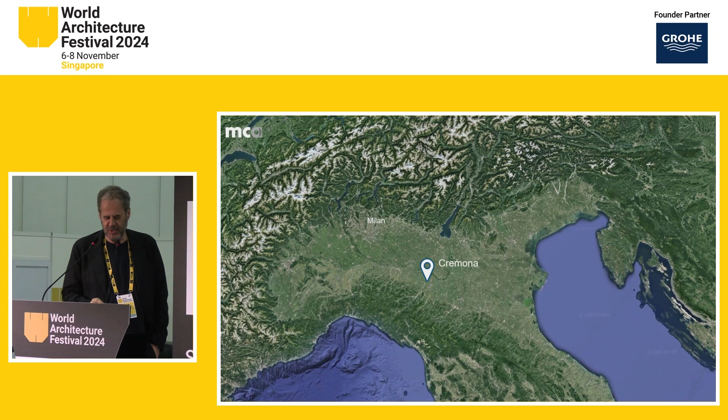Hi, thank you. Well, just introducing, Cremona is a small city south of Milan and is very well known because they made the violin Stradivari, if somebody remembers. That's the city of violins. And also it's the city of music. If you go walking around the city, you can really enjoy music and lyrics.

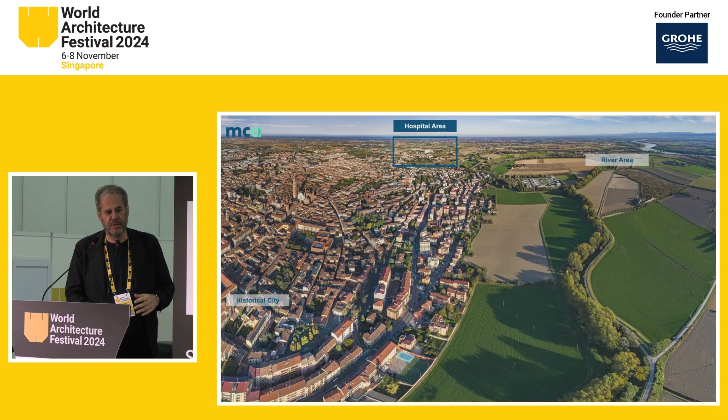So this is a preliminary sketch of the hospital. We are a little bit outside of the historical center, really on the edge between rural and urban. This is a small city, and like a lot of small cities around Italy, the rural area is very close to the city. The hospital is really a link between the rural area and the city center.

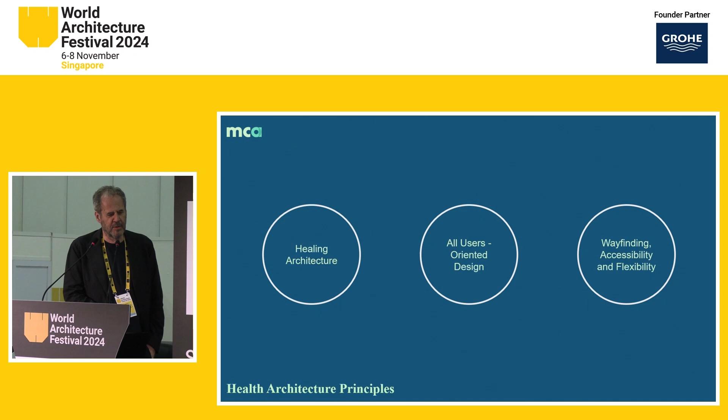It's based on three basic simple principles: healing architecture, all users-oriented design and wayfinding, accessibility and flexibility. What I want to say is there are three scales of this project. One is an urban scale, then a building scale, and then a small part of the building, which is the cell, the room - how we design a room for patients.

So this scheme just gives you the idea - the hospital is a circle, but it's open in the middle for an ecological corridor, connecting the nature from the north to the river. And the building is just green, it's a roof, it's green like the park in the middle.

I was inspired by the hospitals of the last century. You remember hospitals were made by pavilions. A lot of hospitals had a park because the healthy part of the hospital was walking in the park, which has good air and quality. Then we changed structures and made these kinds of big buildings, with no relation to outside.

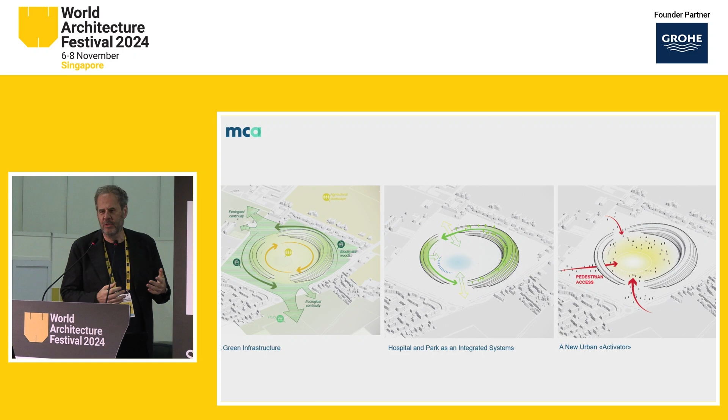So this is the same idea. The building embraces a park in the middle, which is public. And I like the idea that people go to the park hospital for walking, just to get a nice time, walking around the hospital. So it's a primary destination, not only for people for curing, but also for citizens, as it was before. So it's not only specialized for curing, but it's part of everyday life in the city.

So this is a different scheme, and I think what's very important is the division - one wing is all dedicated to the hospital, and the other part is the service for the hospital.

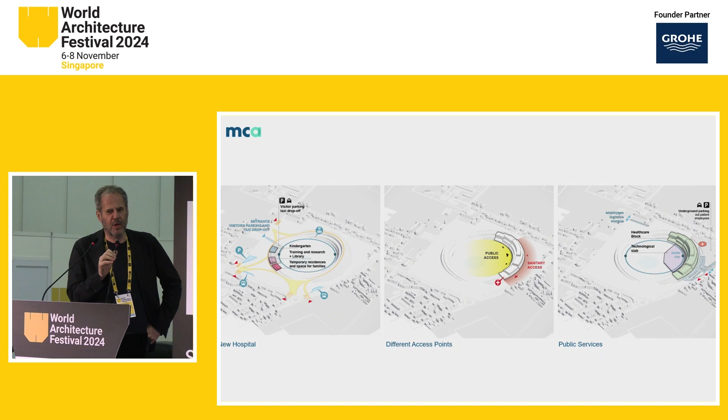I think the idea was not only to take care about people going for curing, because this is 500 beds, but there are 2,500 people working there. So I think you need to take care also for people working every day in the hospital, because there are people spending 10 hours, 15 hours in the hospital.

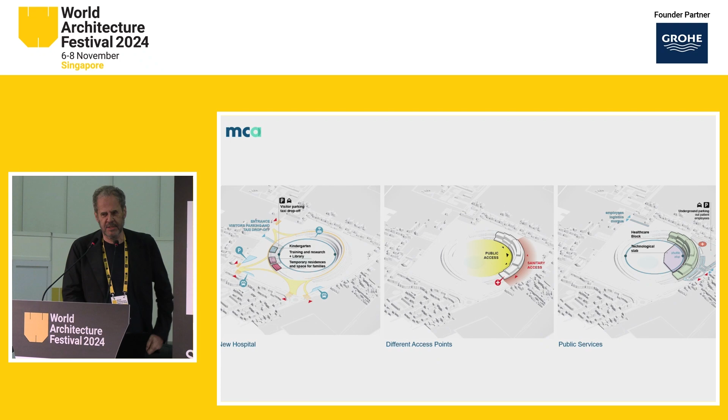So on one side there are services like a little residential for families, a creche or kindergarten, a library, a space for education. On the other side, from outside, is the main access, dividing the access for people going for day hospital and emergency. And then there's always a very large part underground, which is all the operational and technical services.

So that is the scheme of the park - it's really a very large park. As you know, in the last few years, there's been a lot of flooding in many, many cities - recently Valencia, but also Milan, Bologna. So the park has a little pond in the middle, which is an area that can collect water to protect the hospital. But the main idea is that the hospital is around the new park.

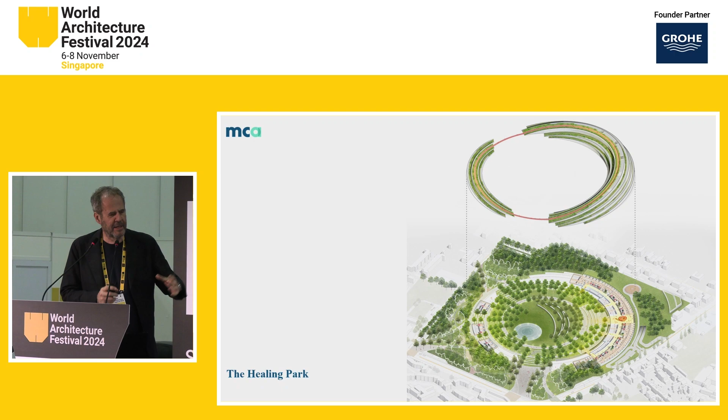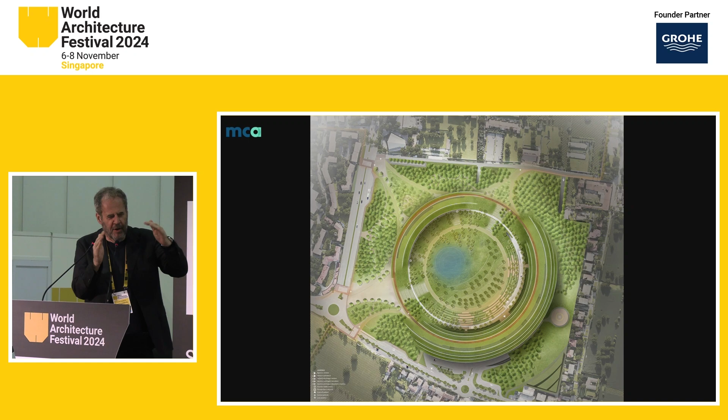It's an empty area, in the edge between rural and urban area. That shows the scheme of the park and access from parking outside. Some parking is underground, but all the edge of this square is residential buildings.

You will see later a detail of the room, and what you see from the room is very important, and the way the room is made makes the management of the hospital completely different. And also because we're very close to the river, there's an area of possible flooding protecting the hospital. So we always work with a very basic, simple principle.

So we think about the orientation of the building, what the room, how much sun the room has, or how much daylighting is going inside the hospital. Now there's something changed also for the operation room, because sometimes the surgeons work for 8-10 hours in darkness, so in artificial light.

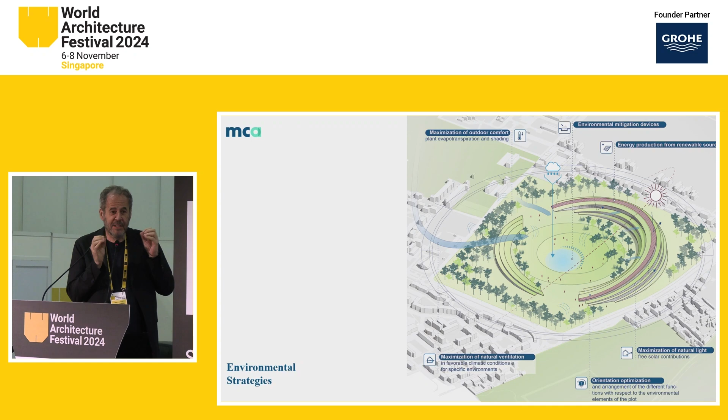So now we are developing the idea that operation rooms have daylighting, because you need concentrated light, but also need an environment much more friendly. And that's the impact of the building on the landscape.

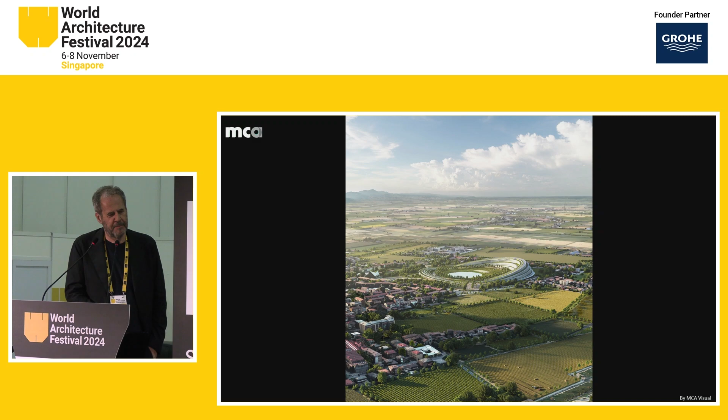You see the city is coming close, but all around is still cereal production and other kinds of agriculture. So I'll go very quickly through this, but the scheme is these two different accesses, from public and from the hospital people.

Then there's a sort of internal street which is more public, with public services like a little supermarket, bars, a flower shop, and you can really walk in a public city space.

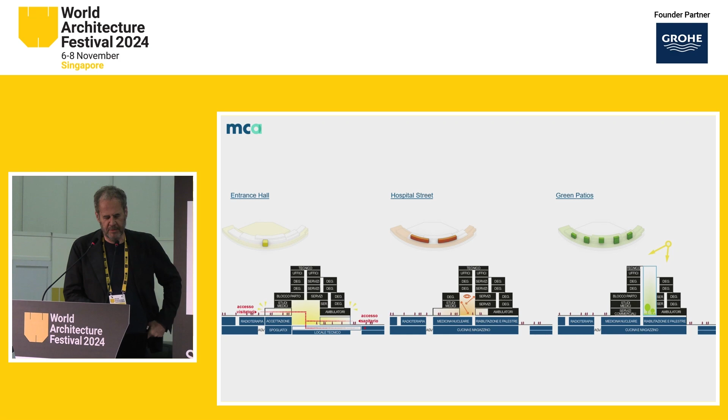And also the patio, the green patio, which is across the building and brings daylighting also from the top of the building to the ground floor. And I think this connection is not only visual, but also vertical.

So I'm not going to go into detail about these floors, but just to know, the first color you see is divided into emergency area, because you remember COVID, it was one of the lessons for hospitals. So the emergency area and area for protecting people with virus need to be separated. And this vertical line is all the intensive care.

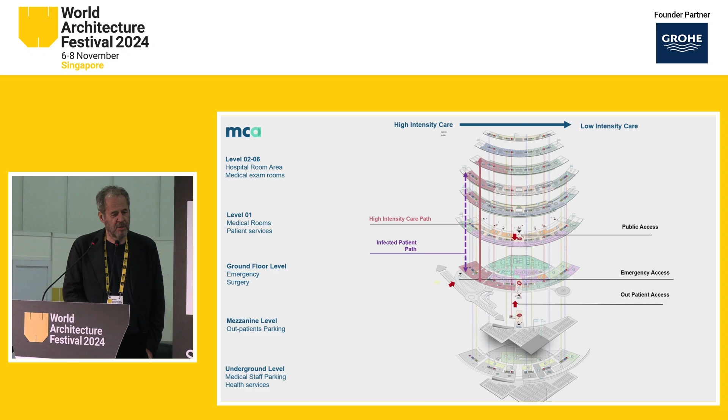Despite the shape of the building, which looks strange to make a hospital circle like this, the program—this is a public hospital, from the government and the local government—was very detailed. I think they did a very good work, and designing a building with a good program is a little bit easier. But a hospital first needs to work.

So it needs to be easy to work in, and management of a hospital is very expensive. So the way you organize floors and the way you move inside is really fundamental.

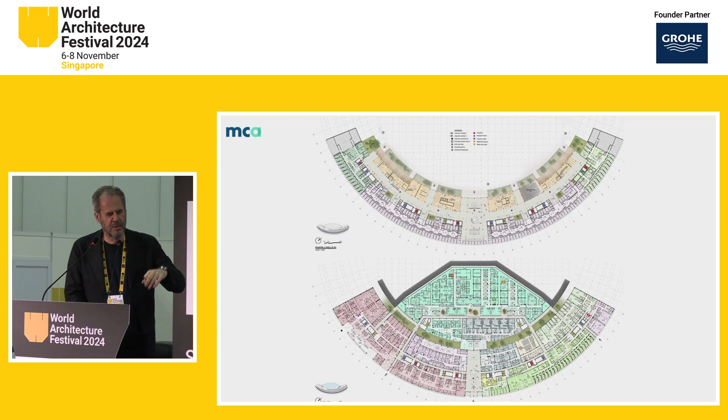So you can see the green area is all the technical and operation rooms, diagnostic and all the services for people. And then you can see in the top of the picture the more public area, the main street with all services, access to the doctor, day hospitals, and all embracing the park.

So it's the main street, two levels, with lighting coming from the top. We designed this really carefully, because I think when you go in a hospital, you don't have a very good feeling. A hospital is always, you're not going to be happy if you go in a hospital.

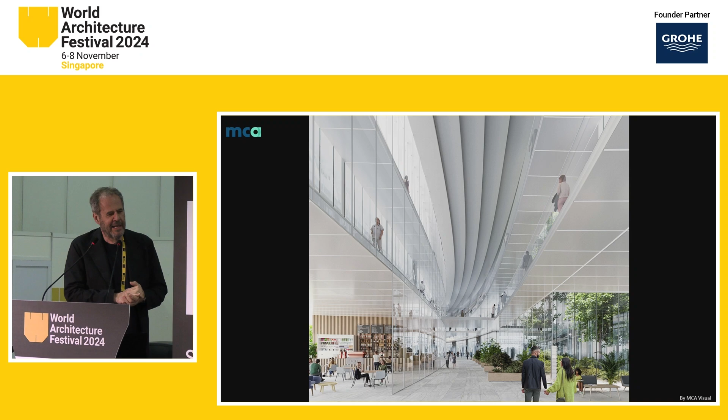I always say also, babies born in the hospital, so there are two different things: one is you go to cure, but the other one is the babies. The idea is to design a place where you feel comfortable, not hostile, not too technical. You need to welcome people in a different, difficult moment. So this is a section of the building.

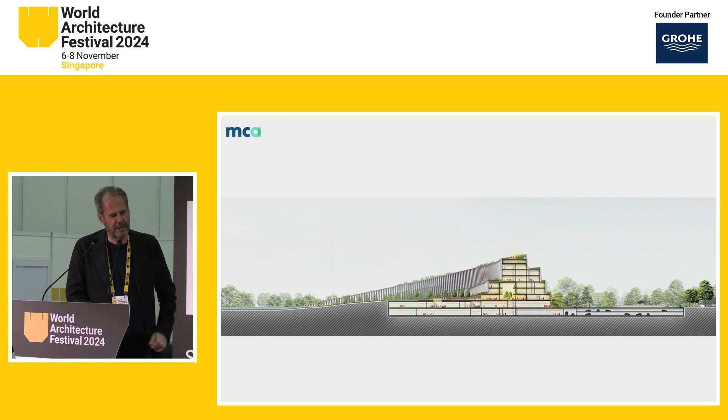You can see this little square is the main street, so it just goes all around the building, and that's the vision on the other side.

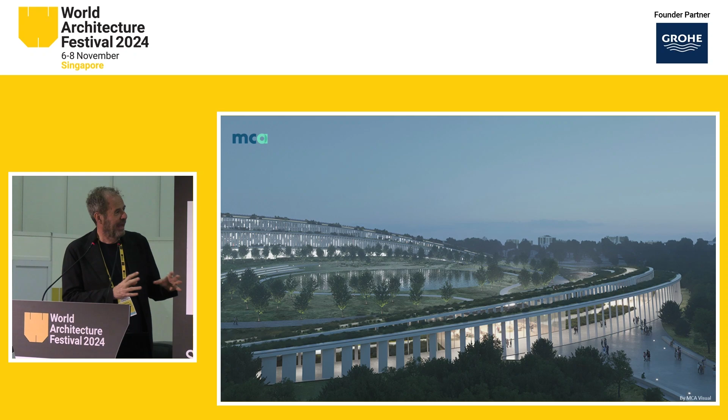If you enter to the other side, the small building is dedicated to residential for families—when you go to see your parents, sometimes it's very difficult, so you need a residential. There's also an education place, a little kindergarten for people working there who need to bring their kids, since managing life and work is always difficult. I think the hospital idea is to welcome patients, but also welcome the people who work in that space.

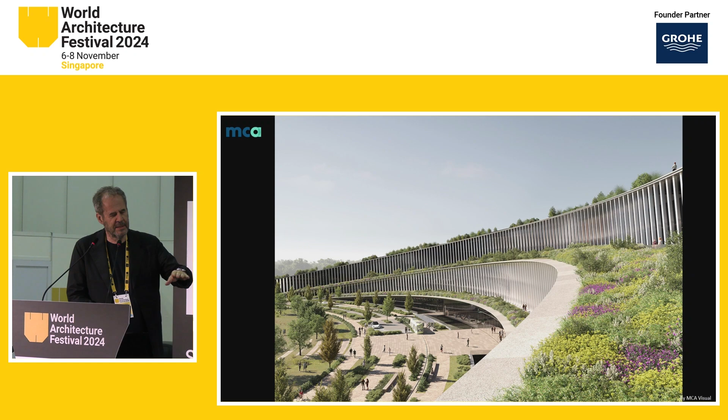All the rooms look onto gardens, so if you're inside the room, you always see this kind of step gardens. From the bottom part is the main entrance from the park. So if you go from a small detail to a big urban scale, then to the scale of a building, then to a detail—the detail is quite particular.

That's one of the reasons why we won that competition. A typical room is this one: you enter, and then you don't see the patient—the patient is behind the toilet. When the nurse walks in at night, they never saw the person inside the room, and the person inside the room never sees the people watching from outside.

So we tilt the room but maintain the structure of the building orthogonal, so when you walk in, you can really see the people in the bed. It looks like a simple thing, but in terms of managing 500 rooms with maybe only one or two people walking around at night, they can really visually see everyone. It's a completely different way of managing that hospital.

There's also the possibility to transform one room into two bedrooms, and also to transform it into intensive care. Because one of the problems during COVID was that there weren't enough intensive care rooms. So it's all prepared to be transformed into intensive care—this gives you a space to adapt the hospital.

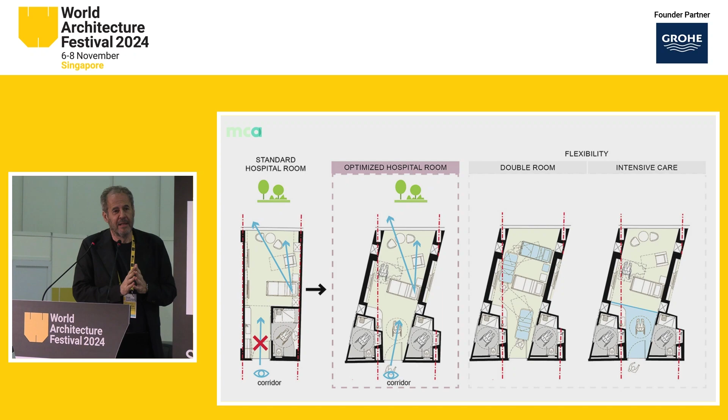Another problem is that in the 1980s and 1990s, the time of hospitalization was between 10 and 15 days. Today the median is 2, maximum 3 days. So you don't need too many bedrooms because the turnover is fast. We're going in the direction of reducing the number of bedrooms because curing people is happening faster and faster, and you need a hospital able to adapt to this different kind of function.

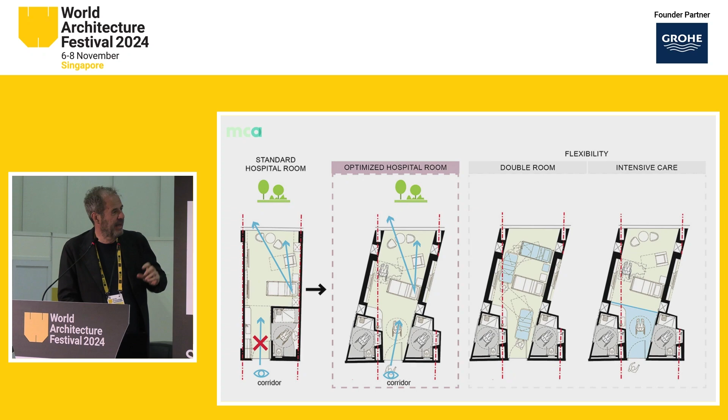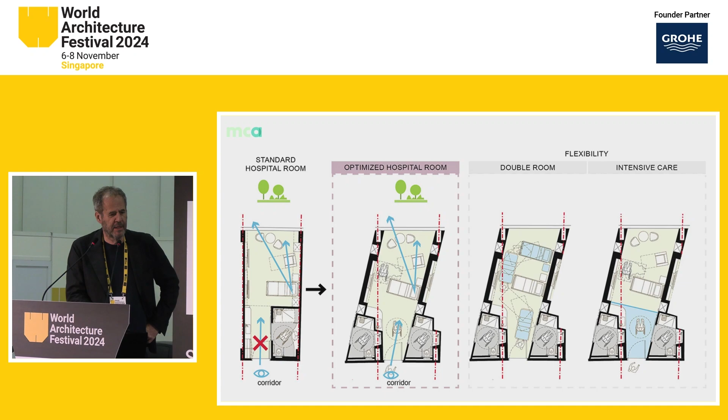Diagnostics is one of the major changes in hospitals—capacity for diagnostics and all the digital things. I think the design was made to adapt this shape, the arch, to change the position of things to adapt the hospital in the future. And that is the scheme.

We just have two schemes, very simple. One is how much daylight gets inside the room, because in intensive care we don't need too much since people are not normally awake. But for people staying these 3 days, it matters how much daylight gets inside the room and what they see from the room.

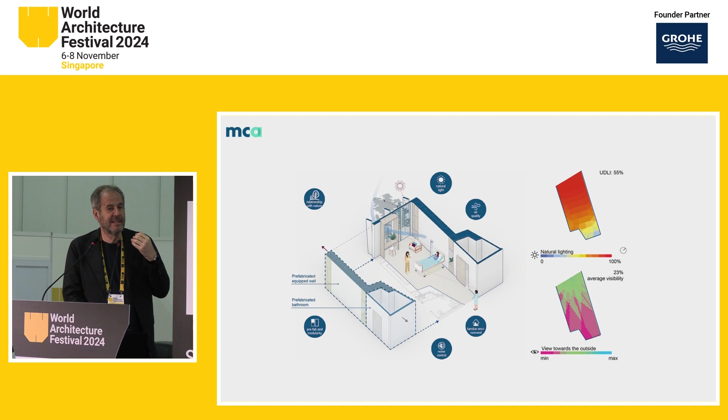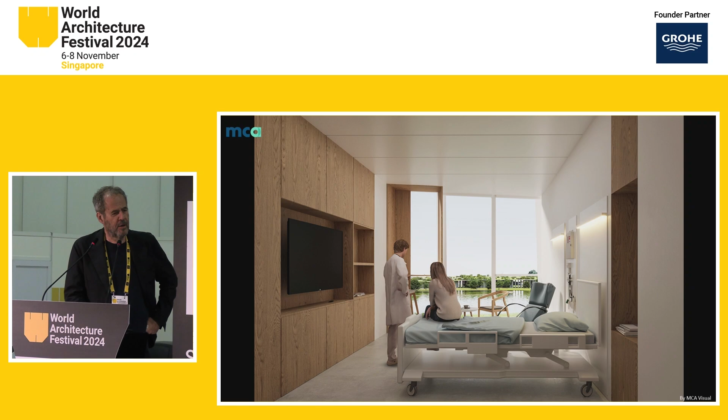That is the picture of what they see. From the room, there are always three windows—you can see outside, you can close the windows, but I think it's part of the healing system, this relation to the park. I think it's very, very important.

And that is the final picture. Thank you very much.